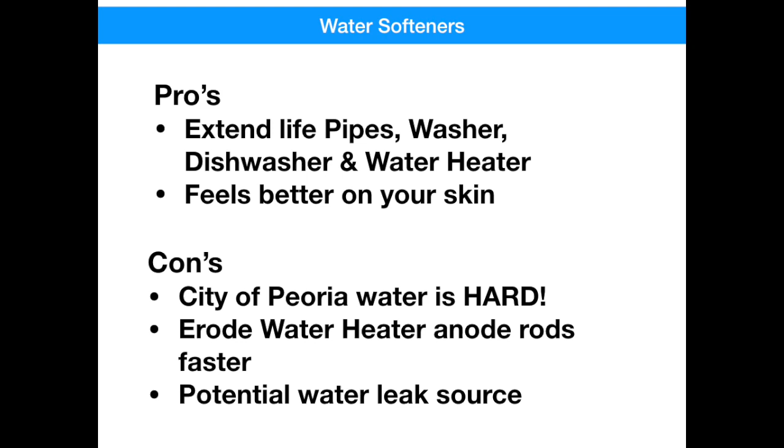The water that's supplied by the city of Peoria is extremely hard. It's well water, high in calcium, high in minerals, and it needs to be treated so it doesn't damage your appliances. One of the components a water softener protects is your water heater. It protects the metal from being corroded, but in the process of doing so, it erodes your water heater's anode rods faster. And lastly, as with any pressurized water component, you're introducing the possibility of leaks through seals, O-rings, mechanical joints, threads, and that's always a risk you need to be prepared for.

So we'll spend our time talking about how to determine whether or not it's properly working, whether it's set right, and some maintenance recommendations. So here's some signs that your water softener may need some service. First, not enough lather. If your water softener is not performing properly, this will be one of the first signs. Laundry problems. Washing clothes in hard water can make them seem stiff and scratchy. Be leery here because the use of fabric softener can mask hard water.

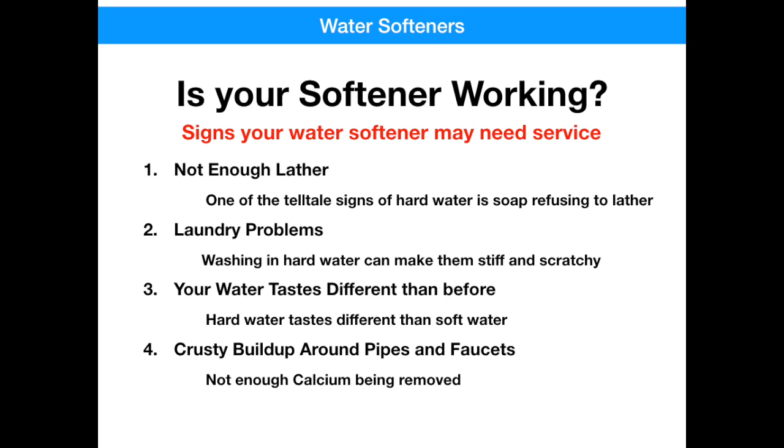Next, your water tastes different. Hard water definitely has a different taste than soft water. And lastly, if your water softener is not removing the calcium from the water, you'll start to see it show up on your faucets and shower heads as a white crusty film. This is definitely a sign that your water softener needs to be looked at.

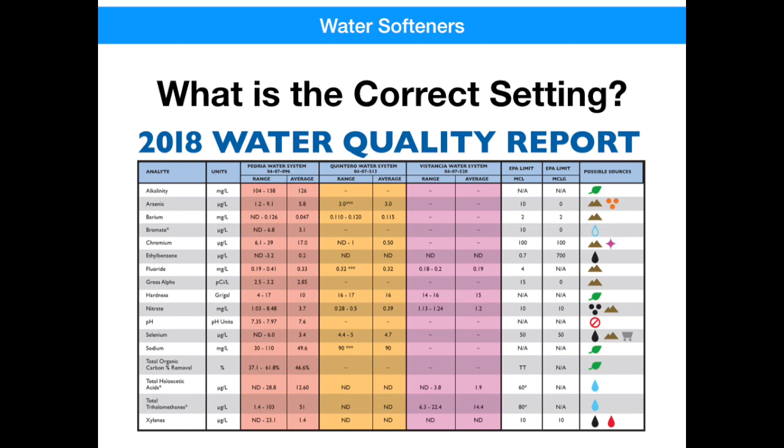One of the most simple reasons that your water softener may be underperforming is that it just may not have the right hardness setting. So let's take a look what that setting should be for someone in the Trilogy area. As I said earlier, our water comes from the city of Peoria, and for Vistancia, our water is primarily well water, high in calcium and minerals. Every year, the city of Peoria is required to publish an annual water quality report and make it available to its customers.

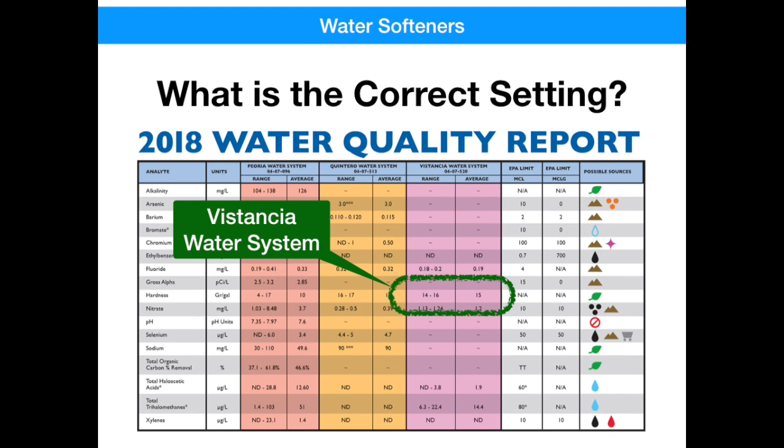The report is broken down by area, with Vistancia being one of those areas as shown here in the pink. One of the specific inspection criteria is water hardness, and as seen here, the water hardness for Vistancia is between 14 and 16 grains per gallon, with the average being 15. I would recommend starting with a setting of 14 and then adjust it up one number each month until you get the performance you feel comfortable with.

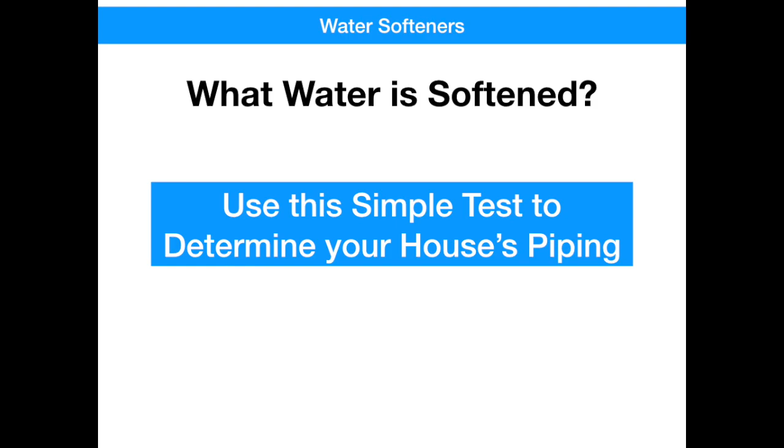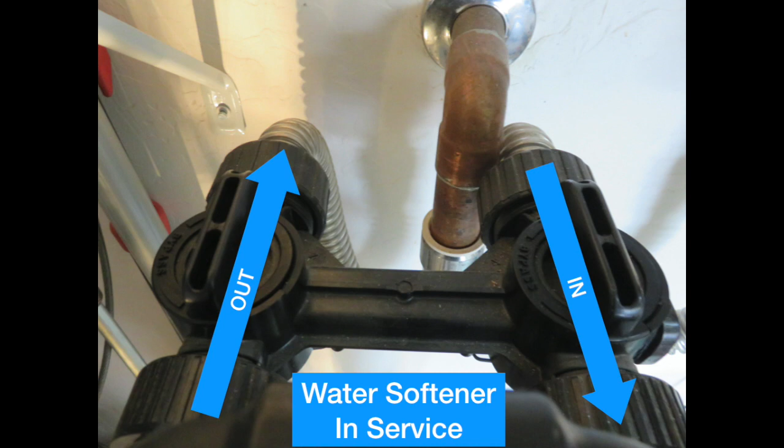So, how do you know what fixtures and faucets and appliances in your house are getting softened water versus hard water? Well, here's a simple test that you can perform, but first let's talk about how a water softener gets its water. Looking behind the water softener, you've probably got a 2-valve configuration similar to this. When the valve handles are in line with the pipe, water comes in through the water softener and then exits out to the faucets and fixtures.

When the valve handles are turned perpendicular to the pipe, water is prevented from going through the water softener and all of the water bypasses around it. Some people will close these valves when they leave for the summer to prevent the risk of a water softener leak. Now the trick to determining which faucets and fixtures get softened water is to do this. Just close one of the valves, leaving the other one open. This will block flow going through the water softener or the bypass valve. No flow will go through at all.

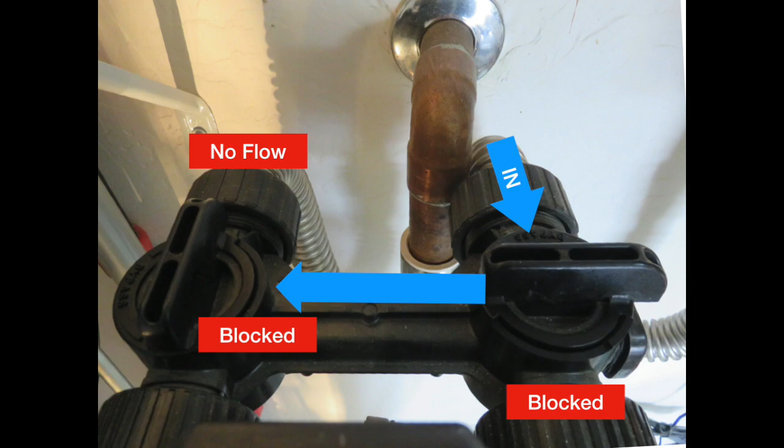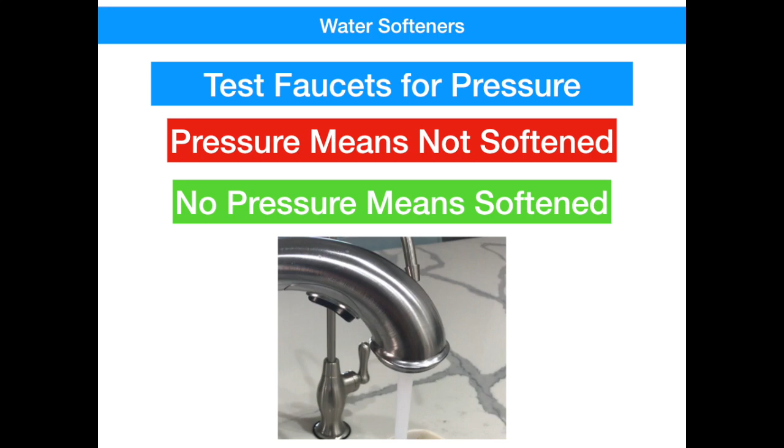With the valve handles in this configuration, you can now go around the house and open all of the valves and faucets that you've got and write down which ones have pressure and which ones don't. The first one will have a little pressure as it bleeds down, but after that, all of the valves that you open up that have no pressure on them at all will be water softened, and the ones that do have water pressure are the ones that are hard water.

I did this for my house, and here's what I found. The first observation is that anything that had a hot water tap was softened. Next, anything that fed a major appliance like the clothes washer or the dishwasher, those were softened as well. Next, all the water used in your bathrooms is softened, which makes sense since this is where most of the suds comes in contact with your skin.

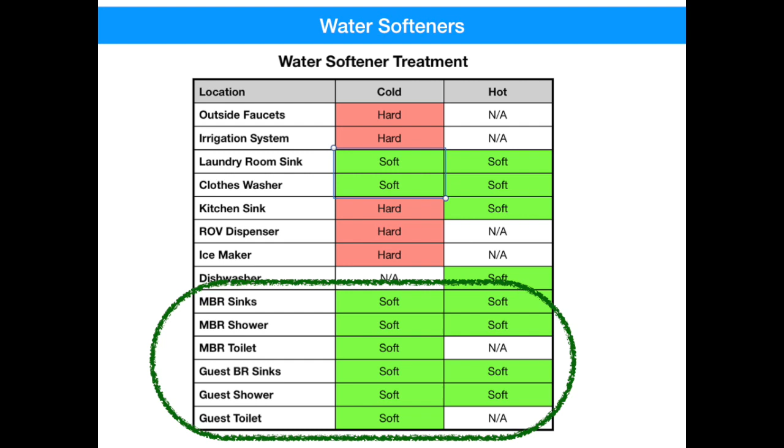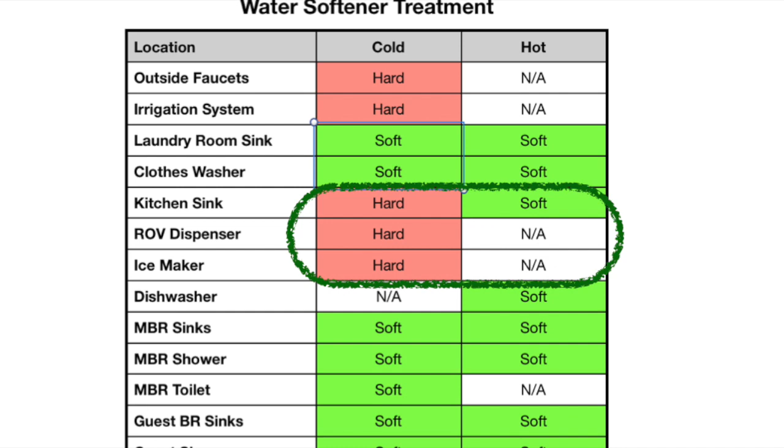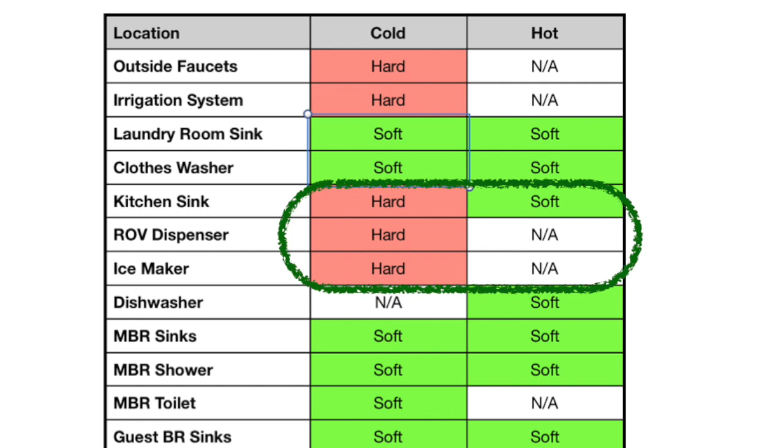Locations that were hard water are the outside faucets and your irrigation system. Now my kitchen sink was a little bit unique. The hot water was softened as I expected, but the cold water was hard. I also found that my RO, my reverse osmosis system, and my ice maker on the refrigerator were both originally fed from hard, but the RO actually removed the minerals, and it was soft, but not because it went through the water softener.

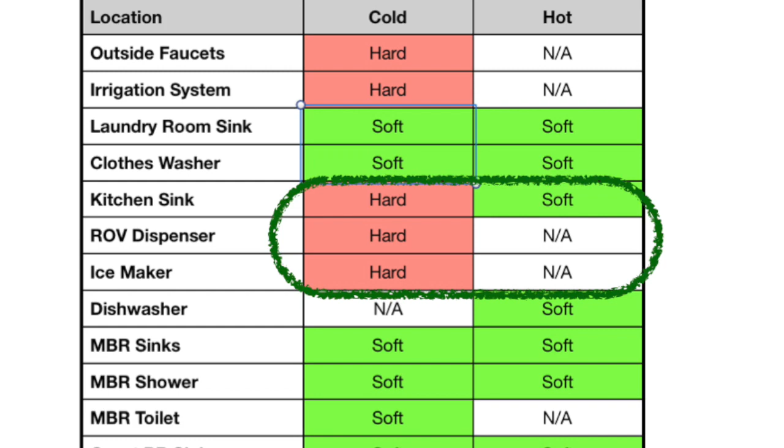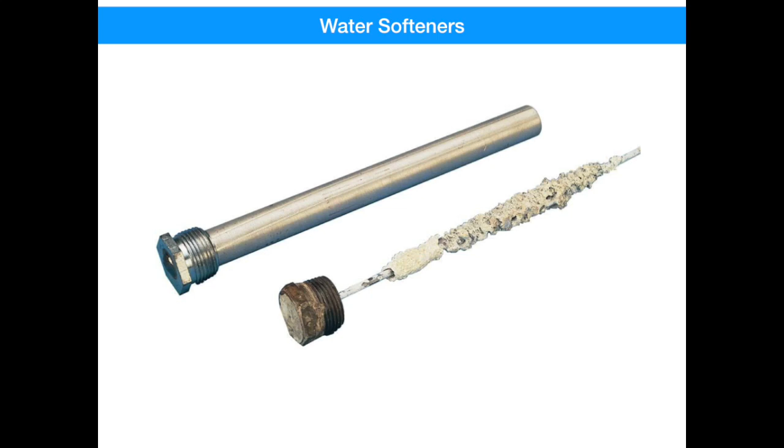Now let's talk about some of the maintenance items that you can perform to maintain your water softener. First, we talked about the water setting, making sure that the hardness grain setting is between 14 and 16. Too high of a setting is going to erode your water heater anode, causing premature failure, so you really don't want to go any higher than you have to. Next, you want to buy high-quality brand name salt. The cheaper brands end up having a lot of residue that works its way to the bottom of the brine tank, where it gets sucked up into the water softener, clogging valves and clogging filters.

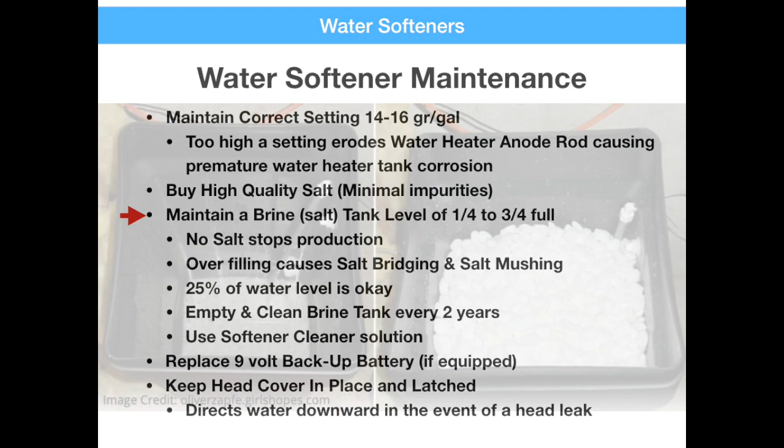Next, one of the most important things you can do is to maintain the proper level in your brine tank or your salt tank. Maintain your salt level between 1/4 full and 3/4 full. Don't go any lower and don't go any higher. If your salt level gets too low, the water softener will stop producing. And if you maintain your level too high and then continue to keep it high, you run the risk of having salt bridging or salt mushing occurring.

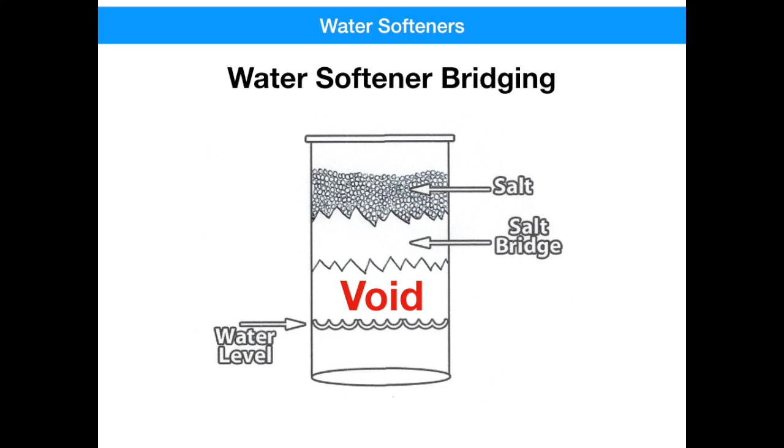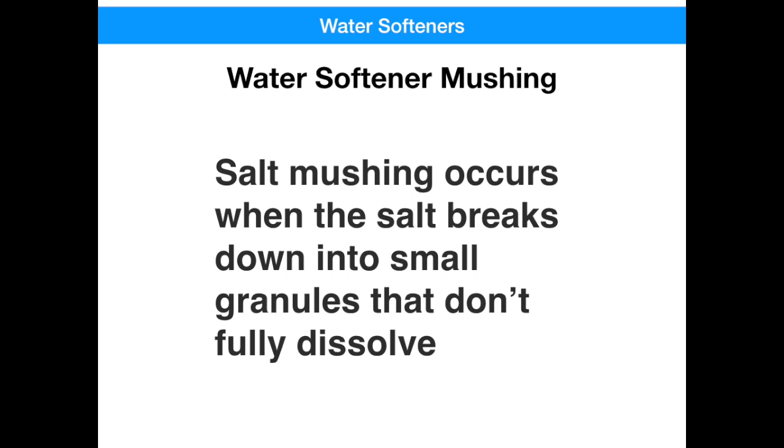A salt bridge occurs when a hard crust layer of salt forms in the brine tank and creates a void between the water and the salt. If this occurs, you need to break through this bridge with a broom handle and break up that crusty layer. Salt mushing occurs when the salt breaks down into small granules that don't fully dissolve. If this happens, it may clog the water intake valve at the bottom of the salt tank. If you see this kind of mush in the bottom of the salt tank, you'll need to empty the tank and clean it out.

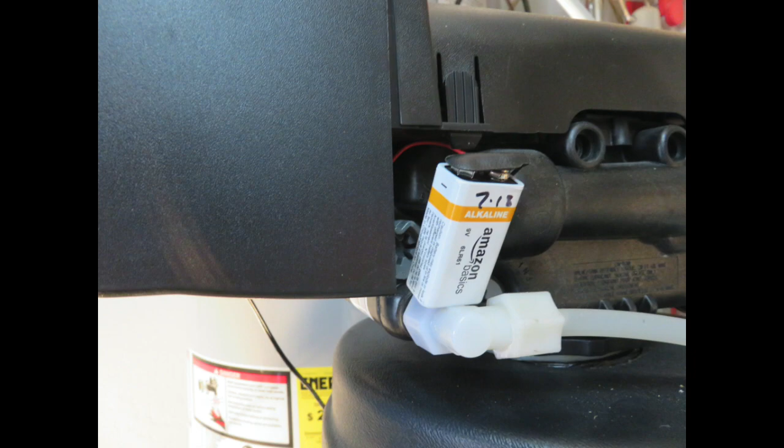Even if you don't see this, it's a good practice to clean out your brine tank about every 2 years. There are also several commercially available water softener cleaners that you can use to keep the performance of your water softener up. These are available at Home Depot or Lowe's. You should inspect your water softener to see whether or not there's a 9-volt backup battery. We don't get that many power outages here, but you don't want your battery terminals getting corroded.

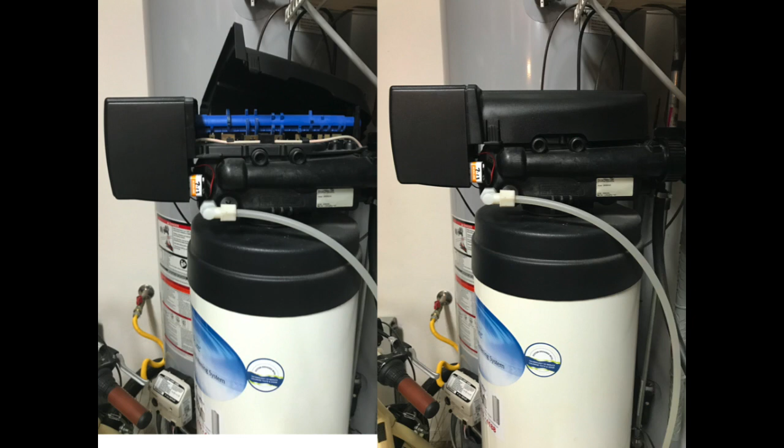And the last item on the maintenance list is to make sure that your head cover is in place and latched. This plastic cover covers most of the gears, the seals, the O-rings, and most of the joints that can potentially fail. If there's going to be a leak on your water softener, it's most likely going to come out of the head, and you want this cover in place to make sure it diverts the water downward and doesn't spray it all throughout your garage.

So what do snowbirds need to know about water softeners before they leave for the summer? The day before you leave, you should force your water softener to do a regeneration cycle. That way you'll have a clean resin bed while you're gone. Next, if you have a shutoff valve that isolates the water just to your house faucets, you don't have to do anything else for the softener because there won't be any water supply to regenerate or cause a leak. Not every house has one of these valves. Be sure you don't accidentally close your whole house valve because you'll shut off water to your sprinklers and your irrigation system.

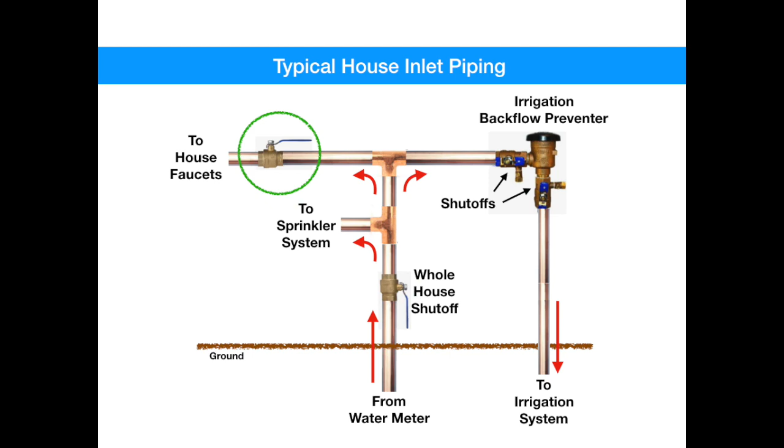If you don't have one of these isolation valves outside and can't shut off the water to the house faucets, then you should align the water softener valves to the bypass position, as we showed earlier in this video. Without water pressure, your water softener wouldn't be able to do a regeneration cycle even if it called for one. Either way, you don't need to unplug your softener. You would just have to needlessly reprogram it when you returned.

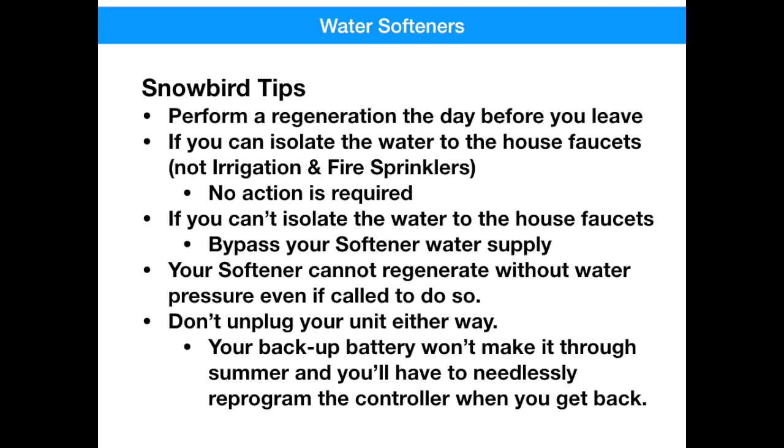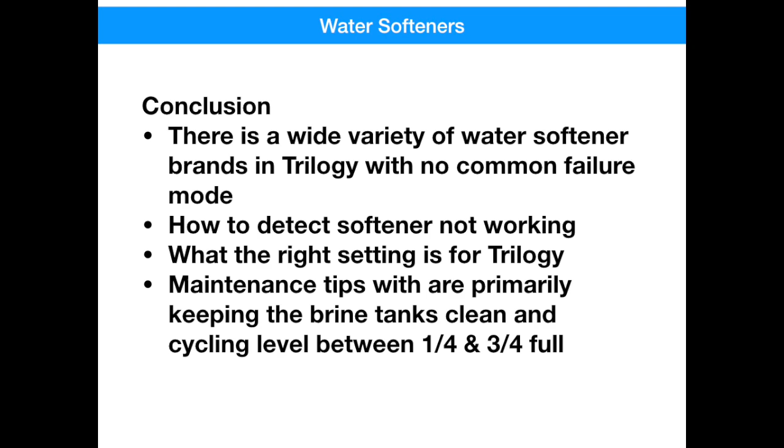So here's what we talked about today. Because of the wide variety of manufacturers and suppliers of water softeners, we're not all experiencing the same types of problems. We talked about how to detect whether or not your water softener is working properly, what the right setting is based on Trilogy and the City of Peoria Water Quality Report. And we talked about maintenance tips, with the most important tip being cycling your brine tank between 1/4 full and 3/4 full, and not being tempted to top it off all the way full and keeping it there.